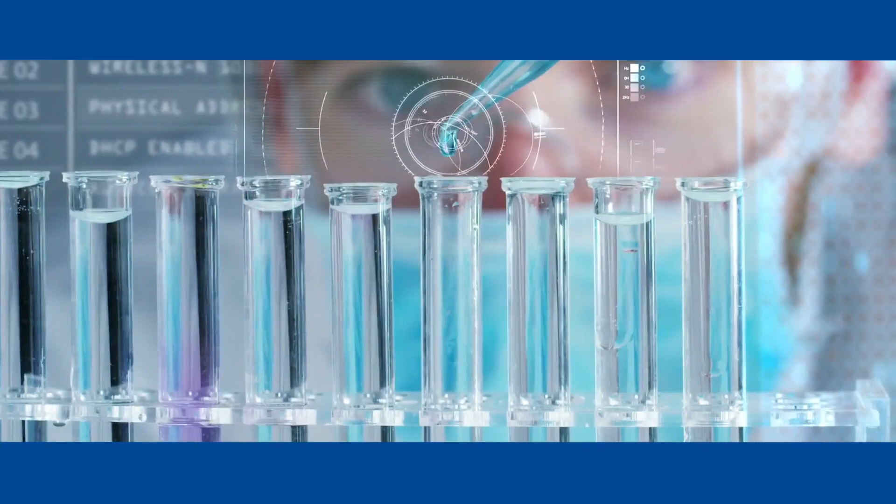In our universe, all things are driven by energy. Energy powers our sun, our environment, our society, even our bodies. Energy is life. New and profound advances in science and engineering are allowing us to harness this energy abundance in marvelous new ways. To create clean, affordable, and reliable energy for all Californians.

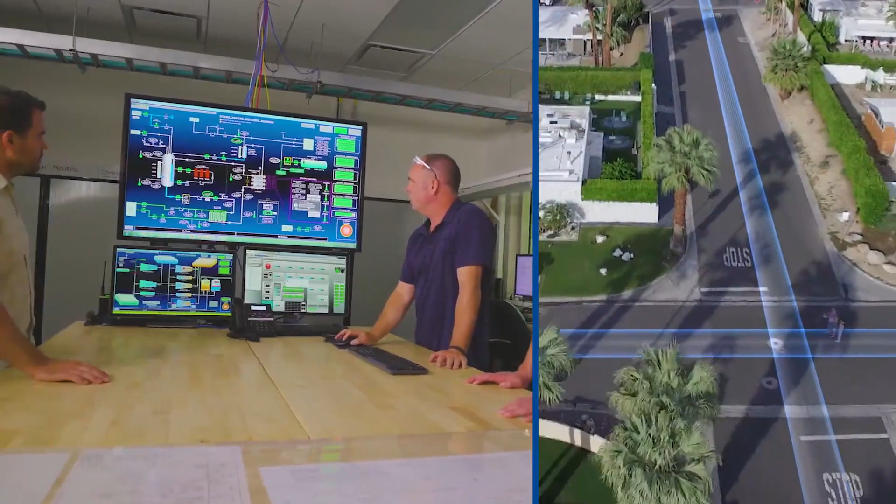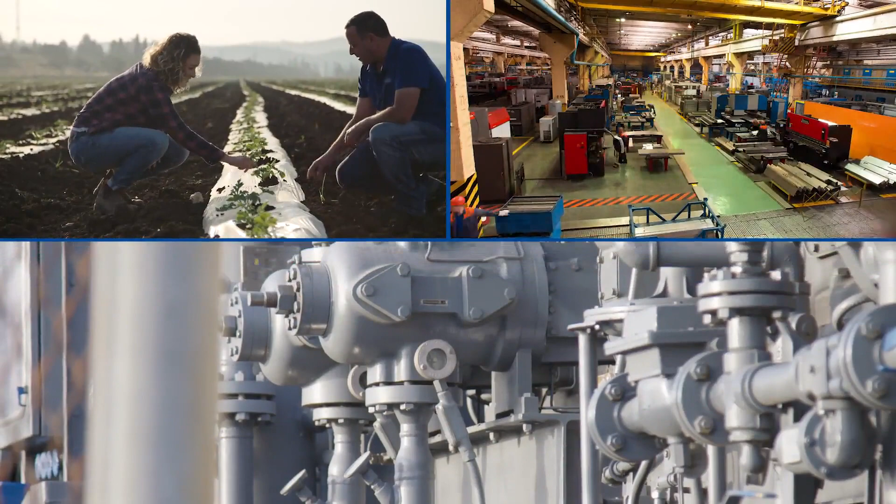The SoCalGas Research Development and Demonstration Program has enlisted an incredible team of experts in science, engineering, industrial technology, and environmental policy to identify, build, and implement these transformational technologies throughout society. Collaborating with the world's top institutions, we have deployed over $73 million on hundreds of groundbreaking projects over the past 5 years. HyET Hydrogen, which could enable transporting hydrogen through existing infrastructure to power fuel cell vehicles and facilities.

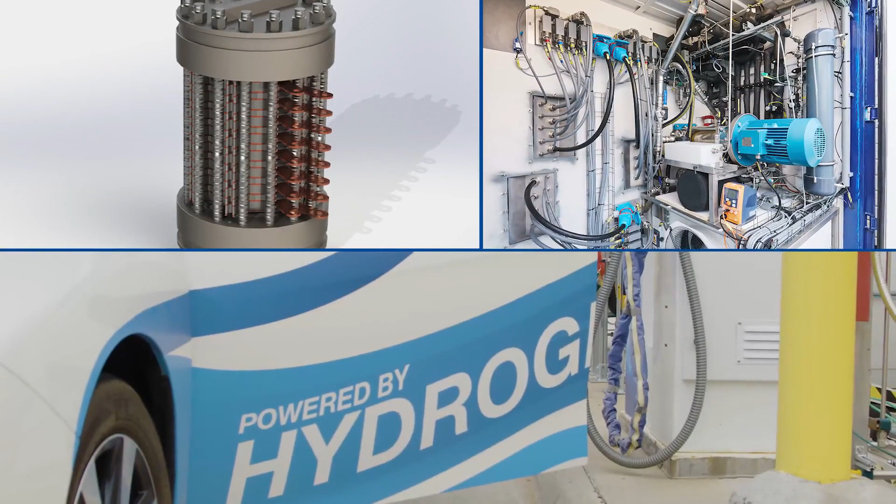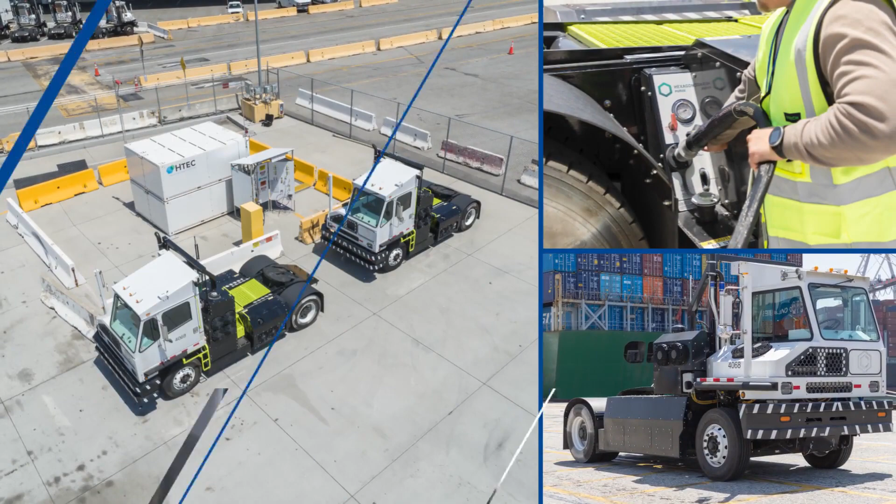Doosan Mobility Innovation's hydrogen drones that have 4 times the flight capacity of lithium-ion powered alternatives. And hydrogen-powered yard trucks that can move massive shipping loads for 20 hours per day with 0 emissions. These revolutionary projects are saving energy, reducing emissions, and improving air quality, as well as increasing energy safety, reliability, and affordability for all.

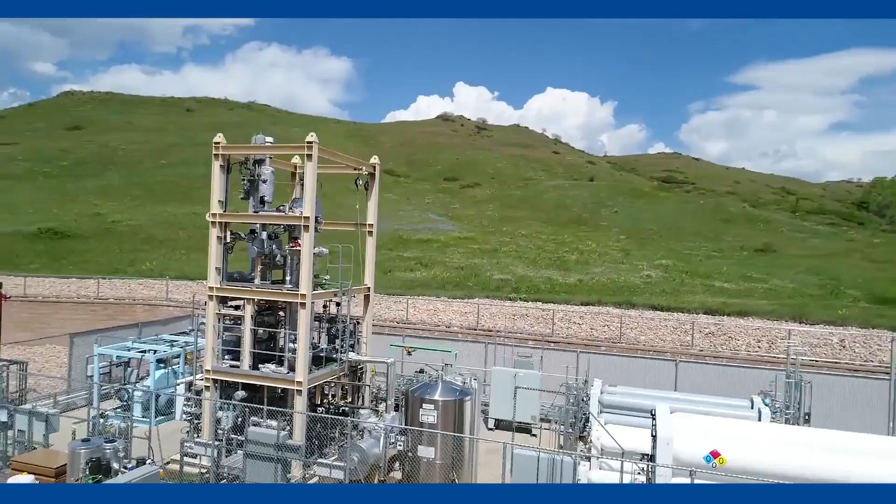At SoCalGas RD&D, we believe in clean energy abundance, so we are sharing this pivotal research in order to deploy these innovative technologies across the world. Because energy is life. And we believe a clean energy future will bring a better future to everyone. SoCalGas, Research, Development, and Demonstration.

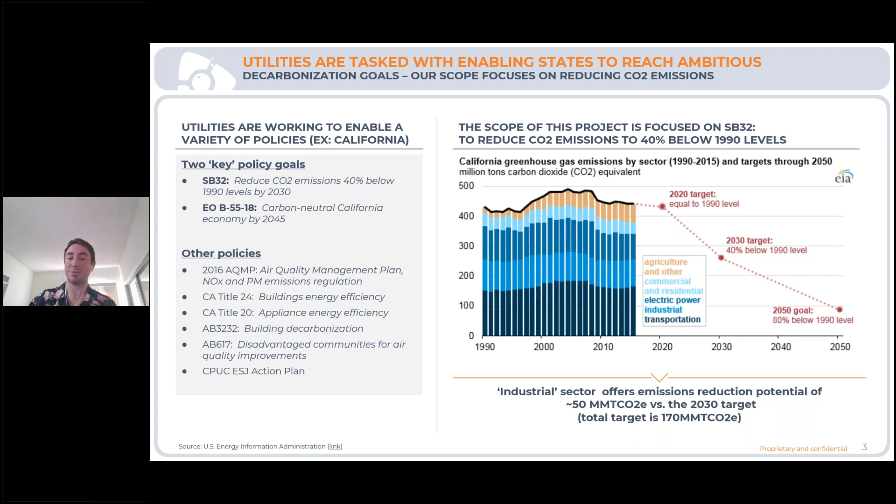So one thing to note is that this graph shows all of the California economy. So today we're going to be zeroing in on that teal color in the middle there, which is the industrial segment of California emissions. So as you can see, there's a ton of work to be done in this space in terms of reducing emissions, right? The net zero goals are pretty ambitious, and so we're going to be moving in that direction.

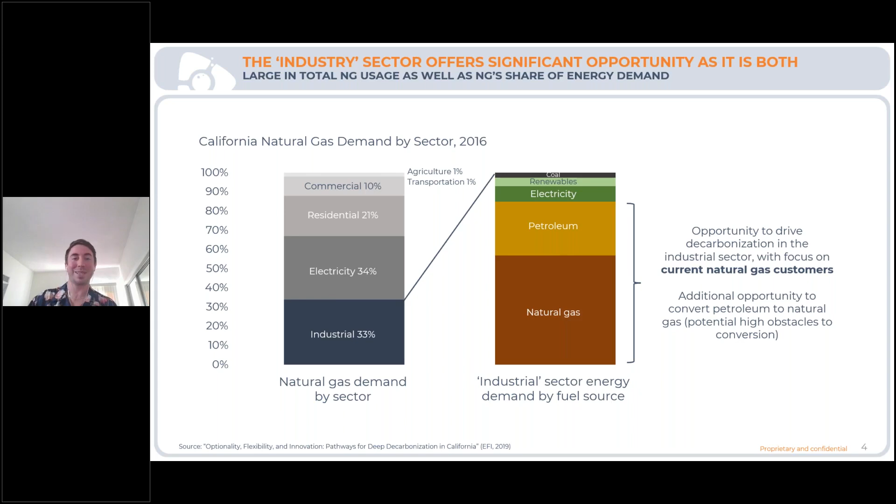Yeah, so just wanted to take a moment to call out quite a large number, like 80% of industrial emissions. So at Darcy, one of our favorite ways to tackle a problem is to start by understanding the full scope of the issue, and from there drilling deeper on a particular topic.

On the customer end of the spectrum, you see a whole different scope of solutions, right, and drivers for decarbonization. So I'm not going to run through every single one of these possibilities for decarbonization, but I do want to highlight a couple in particular. So in particular, I'm going to talk a little bit about combustion modification. So we have combustion processes that can be modified to make processes more efficient, right? So essentially, using less gas to accomplish the same task.

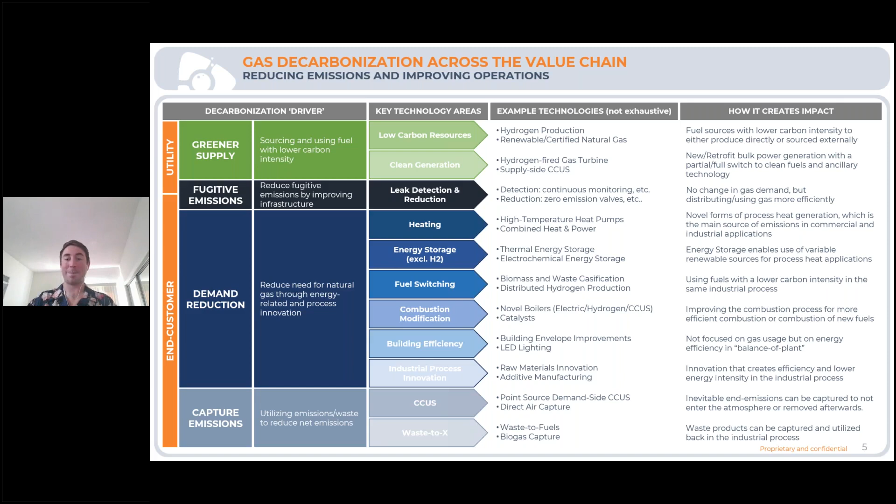You also have industrial process modification, right? So you change an industrial process to not utilize gas or utilize less gas per unit of output. So you can identify those industrial process modifications across a wide spectrum of industries. We'll talk a little bit about arc furnaces in a coming slide. Jumping in to take a look at that framework.

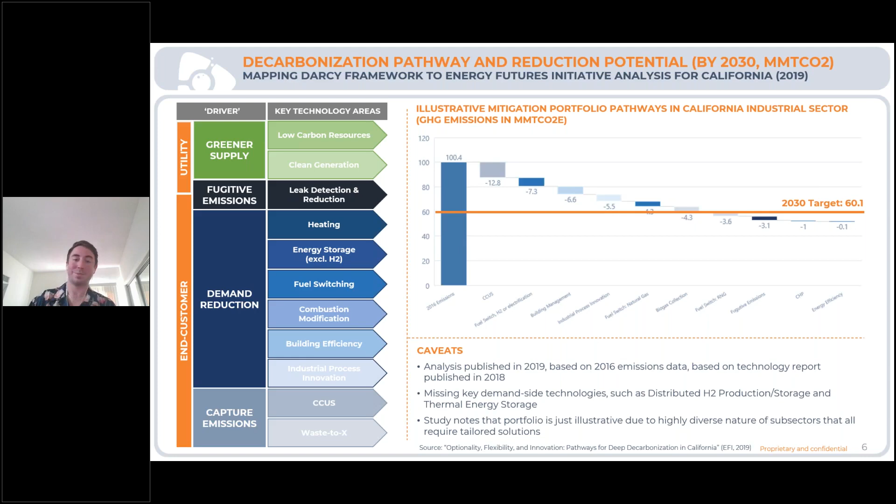So you can see the target here is fairly ambitious for 2030, right? So I think it's like a 40% reduction in greenhouse gas emissions. So from there we dive in and start looking at technologies. So we took a technology-centric approach to this problem of identifying priority technical spaces for investigation for SoCalGas's RD&D team. So to do this, we leveraged a really handy database from the IEA. It's called the Clean Energy Technology Guide.

It's basically a list of technologies with classification by industry NAICS, fuel source, relevance for decarbonization, the function of the technology, right? So where it fits in industry. It's a pretty thorough data set. Highly recommend checking it out if anyone is interested in sort of technology level analysis. We started with a pretty large number of technologies, so 400 odd technologies, and then we down selected to those that are related to sort of the gas industry, right? As I mentioned earlier, gas industry can encompass gas, but also various petroleum products that are switching over to gas.

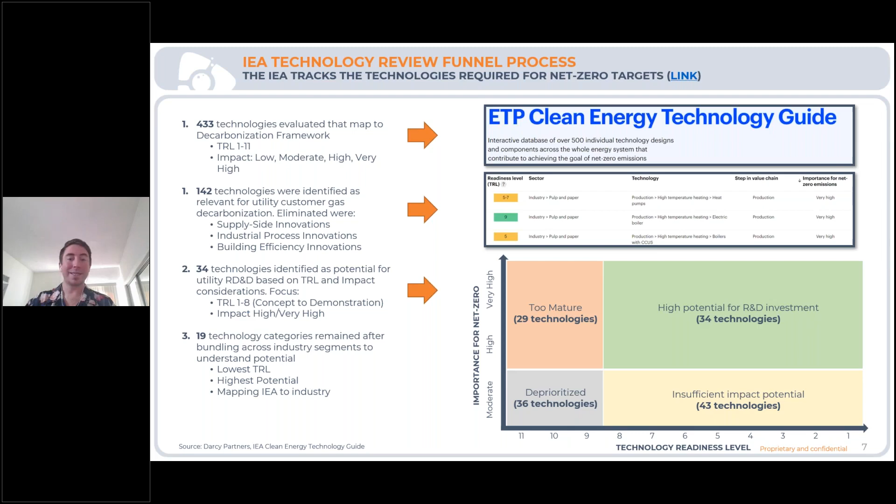One thing to note is there's a bit of a caveat to this slide, which is that we don't have a perfect understanding of the proportion of total energy use by sector that each technology occupies. So to say that a different way, within the metals industry, we don't necessarily have a great understanding of the percentage of total gas consumption that is occupied by arc furnaces or that function within their value chain. So, to a certain extent, this is an approximation of which technologies are most cross-cutting, which technologies have the broadest impact on SoCalGas's customer base.

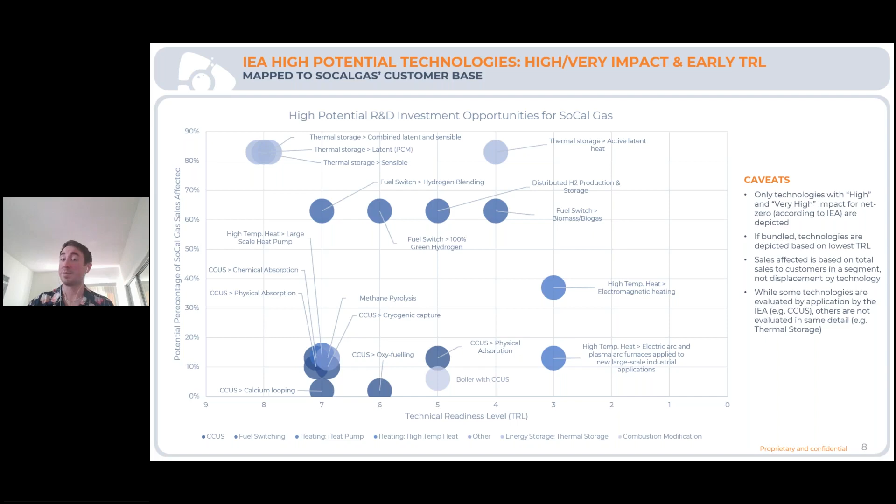The last thing is thermal energy storage, right? Process heat, very common need in industry, and so we wanted to also feature that as a space we'd like to investigate. So, again, going back to our original framework, we pull out the individual spaces we want to explore. So energy storage, fuel switching, in this case primarily looking at hydrogen, although theoretically you could look at other fuel switching opportunities, and then CCUS. So those are the areas of investigation that we're going to really prioritize. There were a couple other opportunities that were more niche in smaller segments of industry, but we're going to deprioritize those for this discussion.

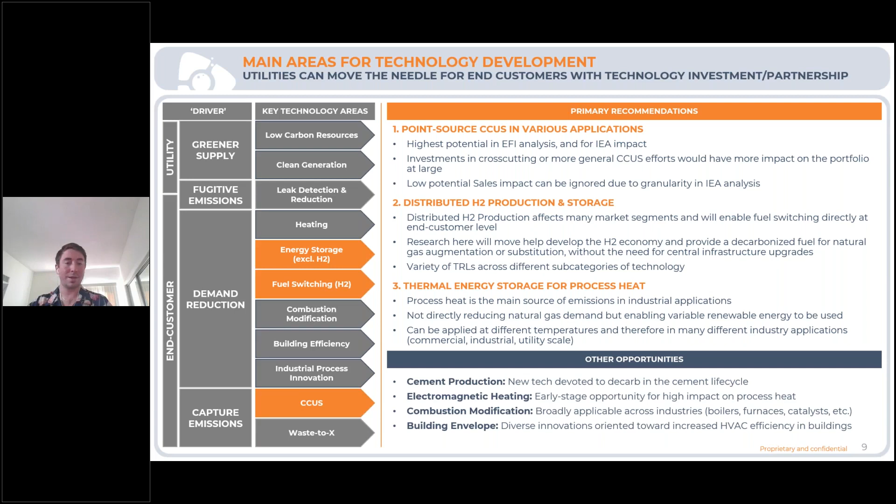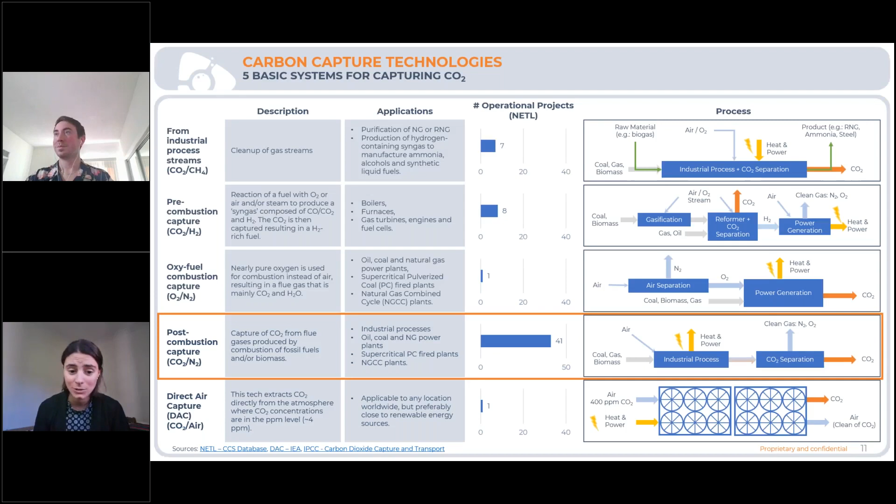As we will see in the next couple of slides, I'm going to be touching base on post-combustion carbon capture and why we think this is a cool technology for industrial decarbonization. So as we see next, CCS is a topic that has been very broadly mentioned and discussed lately. It basically entails all those technologies that would allow you to capture CO2 from flue gas streams. And as you can see in this slide, we have classified them in 5 large groups.

The first one is industrial separation. It refers to the gas streams that have high methane and carbon dioxide contents, and that need to be split out so that you can get only the methane. This is very popular for the oil and gas industry or the biogas industry, for instance. The objective is to clean up a gas stream so that you can keep the methane, mainly because CO2 and methane together can produce a combustion, but that will be very low in efficiency because CO2 does not combust. So basically, you want to have a more efficient gas.

We can see that this type of technology has been implemented in the industry for many years. The oil and gas industry is pretty much an expert in this space, and in the biogas industry, there's also a lot of vendors working here.

The second one, whose application is more driven towards ammonia production, boilers, furnaces, and gas turbines, refers to pre-combustion carbon capture. In these types of processes, there is a previous step in which the fuel is turned into a syngas, which is hydrogen rich and carbon monoxide rich. And this allows you to capture CO2 in higher concentrations, which helps economics and lowers costs.

This is a very good technology, as I mentioned, suited for ammonia production, because in ammonia production, you would need an air separation unit that gets you the nitrogen you need for the ammonia and also helps you get pure oxygen that you would use for the combustion.

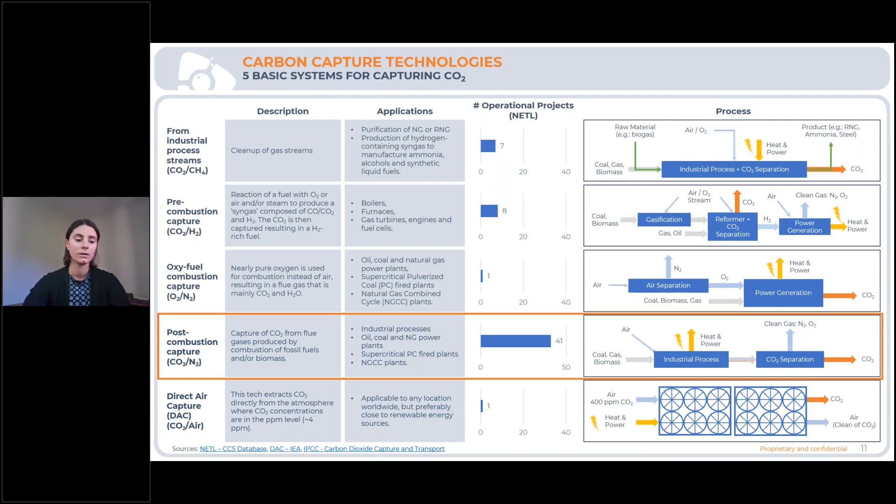So basically, DAC is short for direct air capture, and it entails, as I mentioned, removing CO2 from the air. This means that CO2 has very low concentrations in the air, and that's why it's very hard to take it out. You would need very large facilities, high energy consumption, and though there's a rising number of vendors working on a solution for this problem, we still see that as a longer term solution.

But when we think about a clean energy transition, there's one key factor to consider, and it's that we have an existing industry with existing infrastructure and processes in place. So we can plan new solutions that are completely brand new. So when you think of a new facility or a new plant, you're taking into account that there are novel technologies that are more efficient, that allow you to produce something that will be cleaner for the environment, with less emissions, so less carbon intensive. But there's a ton of technologies that are already out there. You already have your facilities in place, and that's why post-combustion CCS makes a lot of sense.

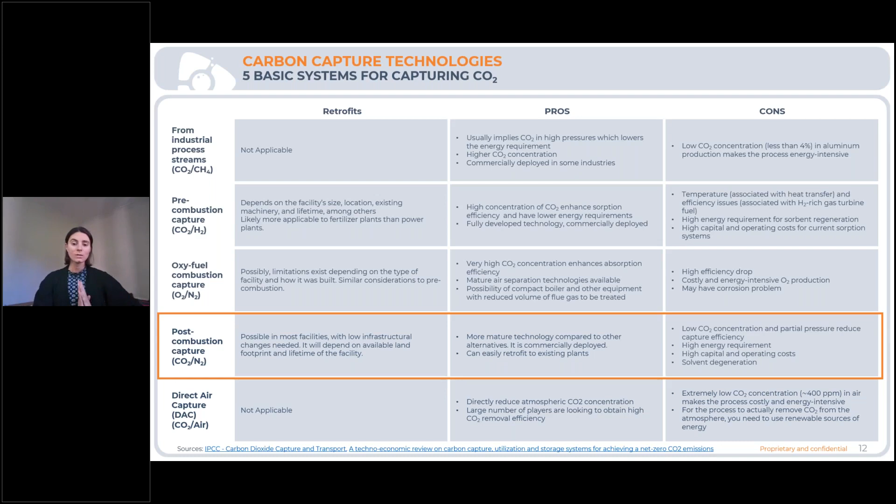As we move on, I will also be looking into some of the economic incentives that we see in this space, mainly because, as you may know, this is still not the cheapest solution ever. So basically, the US government is incentivizing this type of process. There are several ways in which we've seen funding in this space, and in particular, the 45Q tax credit is something that we need to mention and you might be aware of. For the 45Q tax credit, after the IRA, there were some critical changes to this credit that made it available to a broader audience.

Also, the tax credit lowered the threshold at which a company can get 45Q credits. You would need to have emissions of 12.5 thousand tons of CO2 per year. That's about 35 tons per day of carbon dioxide. And you can get up to $85 per ton of CO2 captured if you're going to store it, or $60 per ton if you're going to use it.

Thereafter, the industry has taken a big step in this space, and there's a big momentum all over the world. According to the Global CCS Institute, from 2021 to 2022, there was a 44% project increase. And from 2022 to 2023, there was a 48% increase in projects with 198 new facilities announced. So as you can see, the industry is really picking up in this space.

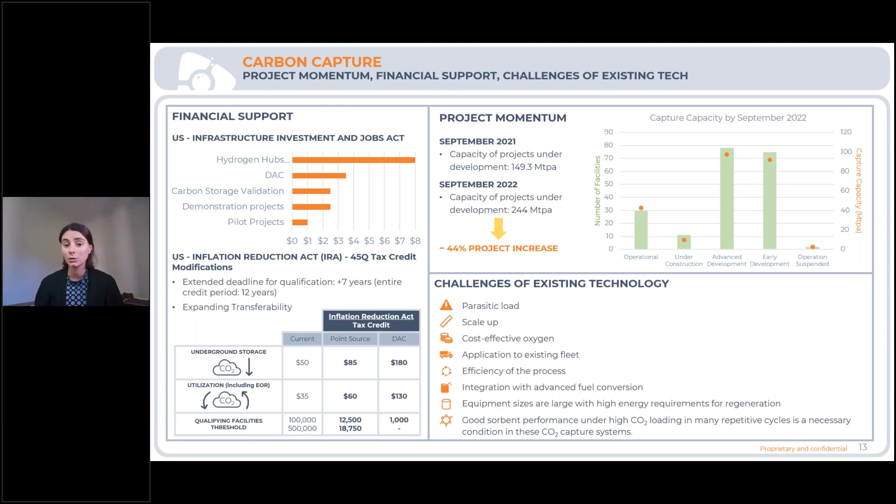The positive thing about this technology is that it's well known, it's proven, and we know how the chemistry works. However, amines are very sensitive capture devices, and so we need to be very careful with pretreatment. We need to take off sulfur compounds, and we need to be very careful with temperature of the process. Temperature is also needed to desorb or release the CO2 from the amine, so that's something else we need to take care of. And that's why we see more innovation in the other sectors, because we want to find other technologies that will help tackle those problems.

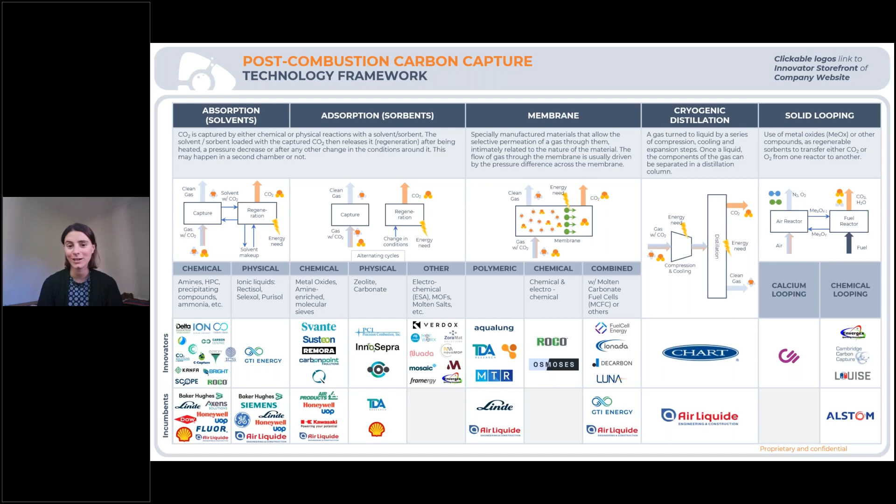Thank you, Maura. So as mentioned by Nolan, one of the areas that we identified as a unique emerging opportunity for research and development is in hydrogen's role in industrial decarbonization. So there's a lot of hype in the hydrogen world right now. I'm sure many of you heard about the recent hydrogen hubs announcement by the DOE and the ample amounts of funding opportunities to propel cleaner hydrogen solutions to commercialization.

So one hill that I'll die on is eternally emphasizing the fact that hydrogen is not a hydrocarbon. We've been spoiled for decades by an easy to handle energy carrier molecule. So hydrogen will definitely thrive in certain early markets, but with its physical and chemical differences, difficulties in storage and transport, and the nuances of new permitting, enabling infrastructure, it has to be approached strategically and with a broader view of what existing infrastructure exists, what barriers to entry are on the TRL, new infrastructure cost, permitting, and financing side, and what first stage use cases and customers might be the most successful partners for offtake.

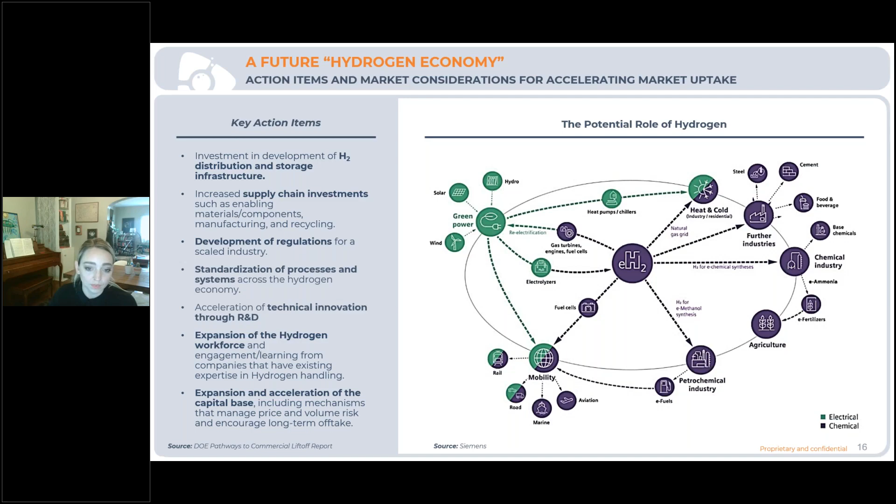So moving on, I want to highlight the broader spectrum of hydrogen production pathways that exist. Many of you have likely heard of the colors of hydrogen. So you've got blue, green, pink, turquoise, etc. The list goes on. I have to say, I absolutely hate this differentiation. We've created the colors to separate different production methods. So now when you think of green hydrogen, you think electrolysis. When you think of any other feedstock-based production method, we typically assume higher CIs or carbon intensity scores alongside of them. This can be a dangerous over-dichotomization.

So on the one hand, I understand not wanting to allow a window for increased hydrocarbon production with the goal of producing clean hydrogen, but realistically, there are many places and situations where hydrocarbon assets or waste exists more readily than water or clean electricity. So considering near-term, mid-term, and long-term end uses and off-takers of clean hydrogen, alongside the difficulties of wider scale storage and transport infrastructure build-out in the near term, I think it's important to consider our existing infrastructure, assets, and potential feedstocks for each off-take location when we're looking at distributed hydrogen production, and focus entirely on lowest possible situation-specific cradle-to-grave carbon intensity.

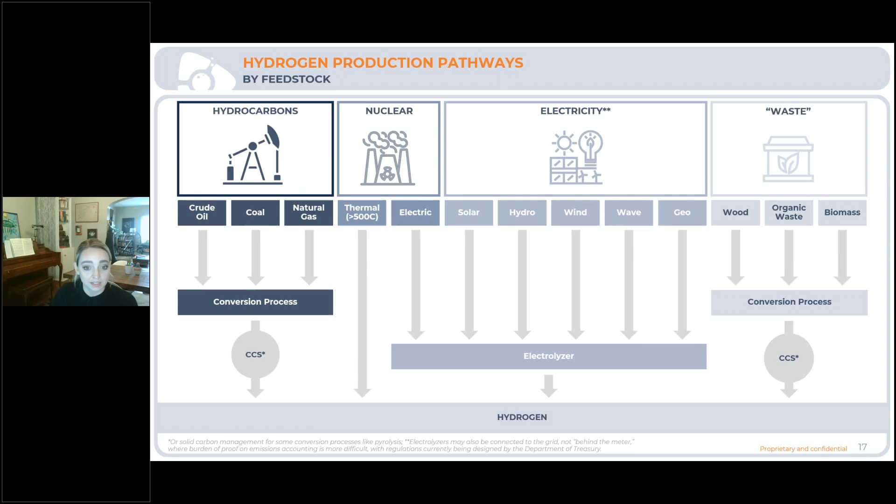So for this exercise with SoCalGas, we zoomed in on hydrocarbon feedstock to focus on industrial customers that have existing natural gas connections with, of course, an eye on implications of emission sources down the entire process, both up and downstream. But first, I'll zoom back out to a feedstock agnostic discussion of the distributed approach with the next slide.

So here I'm going to give an overview of the primary thought process behind choosing a distributed model of hydrogen production versus a traditional centralized production model, with an emphasis on different feedstocks and production types. And then I'll show you the broader landscape of vendors targeting this deployment approach and then we'll zoom in on the technology focus that we chose in this project, methane pyrolysis.

Even our businesses in the space are built to accommodate the system with upstream, midstream, and downstream operators, often split as separate entities, and large-scale production chosen to take advantage of economies of scale. This is, however, and I think we'll see this more with the nature of hydrogen and some of the safety and handling concerns it brings in physical form, limited by hefty requirements and complexities with permitting and developing individual projects.

So with hydrogen specifically, we have the issue of mass infrastructure requirements and complexities with both storage and distribution infrastructure, as mentioned above. And where typically the economics of distributed molecule production might not have previously made sense, we have to, especially for near-term deployments, gauge the cost with the cost of infrastructure retrofitting and additions.

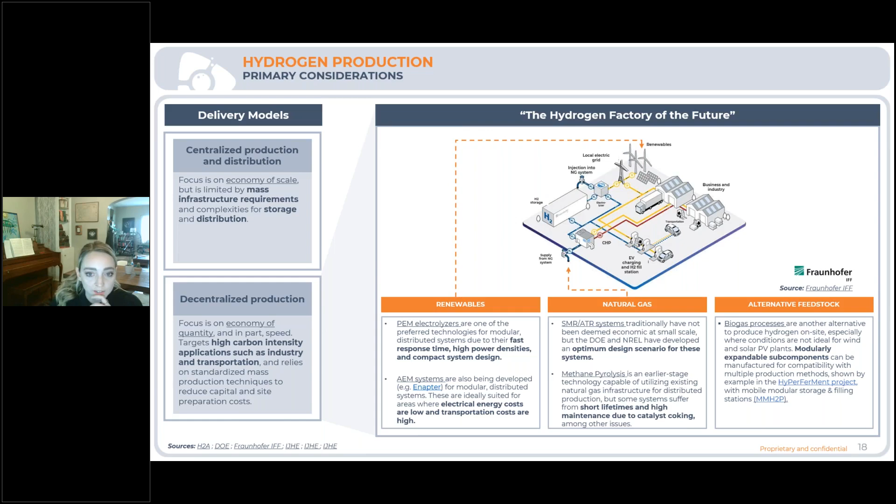In the turquoise or methane pyrolysis space, I've separated by pyrolysis type, and I'll discuss that a little bit more in the next slide. The companies in the green space are also separated by tech type, where I gave an overview of the different qualities of each production method and applicability to distributed use cases in the last slide. And finally, the waste to hydrogen bucket, where you can find companies targeting distributed scale waste to hydrogen production, optimizing on circular economy measures by using feedstock that we want to get rid of anyway.

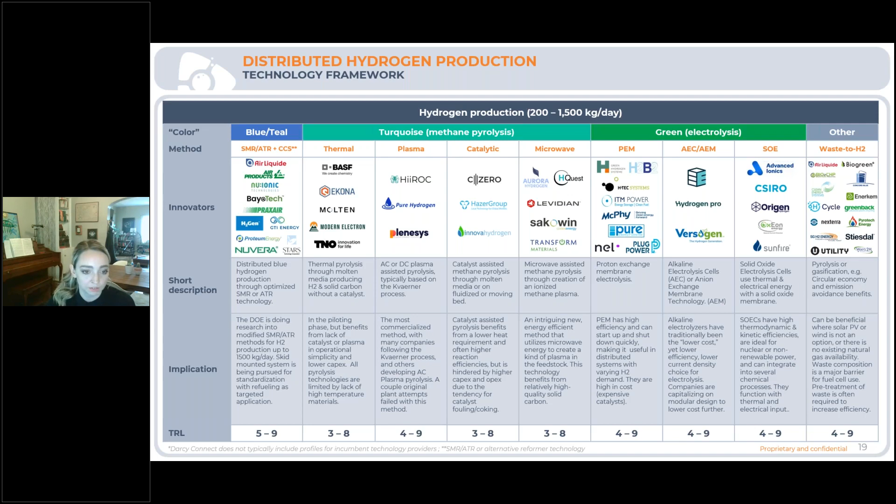So typically this falls into one of three general categories: thermal, plasma, and catalytic. The thermal pyrolysis reaction typically occurs either on reactor walls, in liquid metal, or in carbon granules. Plasma-assisted pyrolysis utilizes a plasma torch and often occurs over a metal catalyst. There are also newer methods in the last bucket that kind of fit within this category, but also kind of not, and that's microwave pyrolysis, which actually utilizes microwaves to create a type of plasma in the feedstock itself. And then finally, catalyst-assisted processes occur over a metal or carbon catalyst. So note these methods by some vendors will in some way be combined, but this is the easiest way to break it down.

So if we're comparing this to SMR/ATR, no CCS infrastructure is required due to the innate process sequestration of carbon as a solid. And CCS is typically not cost-effective in the status quo at the distributed scale. This method also has a lower energy consumption, at about 30 kilojoules per mole of hydrogen, than electrolysis and SMR, which come in at about 300 kilojoules per mole of hydrogen and 64 kilojoules per mole of hydrogen, respectively. Those are general values; they're technology dependent. But finally, there's potential economic value as well of the carbon product.

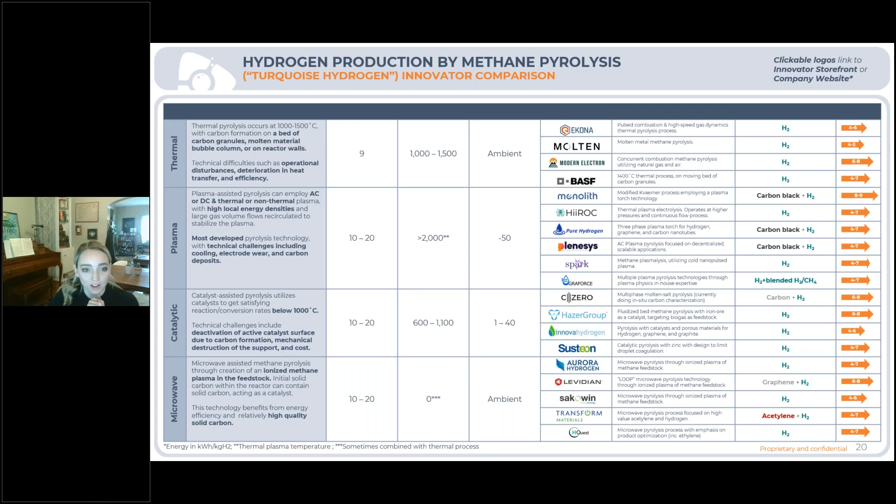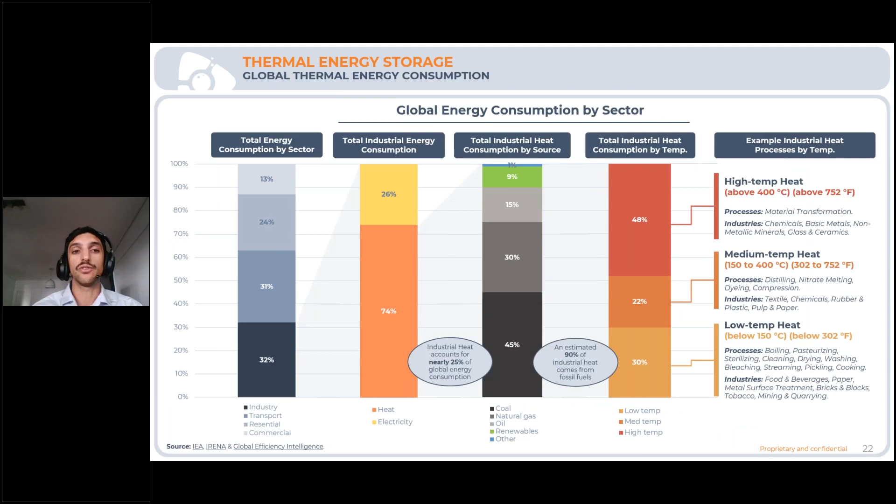So it is necessary to be aware of these temperature ranges required by these processes that we are looking to decarbonize. On the one hand, we need to be aware of that, to know which technologies we need to provide that heat from a renewable source. And on the other hand, to select the right vendor and technology to store and manage that heat through a thermal energy storage or TES system.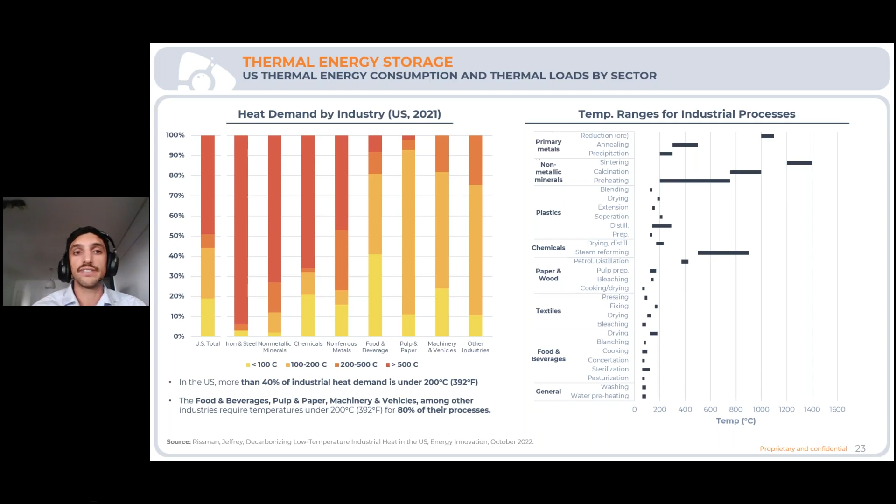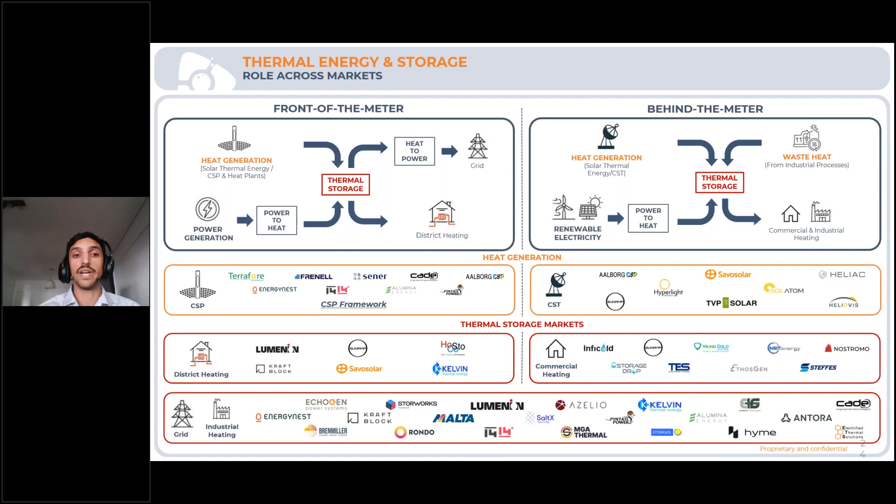And then, which is where we will focus mostly today, the lower bucket, which is TES for the management of heat in industrial processes. And the majority of these systems and these vendors, as we'll see on the next slide, can be also used for grid scale heat and power management. And that's why it's the only bucket across both front of the meter and behind the meter applications.

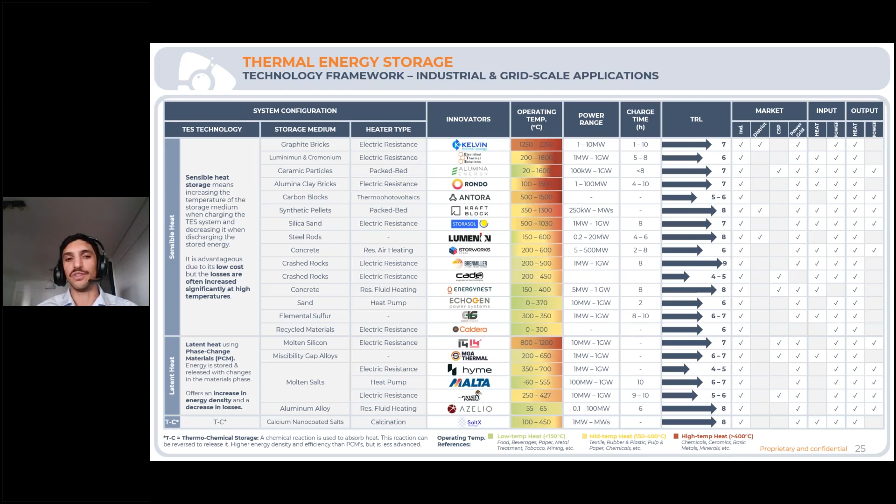So yeah, hope that all made sense. And I think we will be moving now to the Q&A. So open to any questions there.